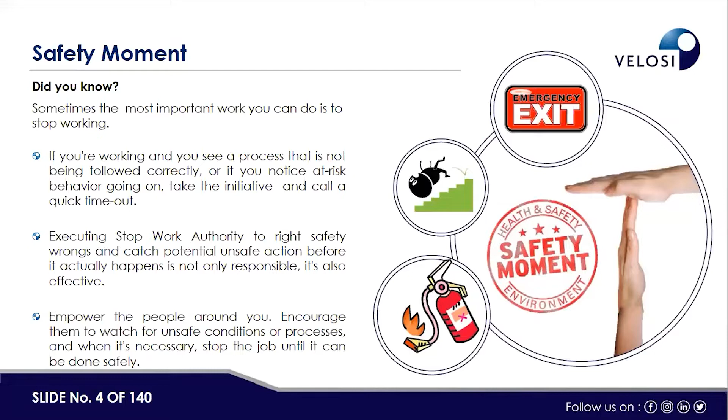We'll be touching key theoretical and practical aspects of the implementation of ASME B31.8S and API 1160. Today's agenda includes an introduction about Velosi, the pipeline integrity overview, standards and regulations. We'll be sharing one case study overview, and we'll be presenting the software demo.

We will be following a practical approach and walk you through the key steps through the case study. Please note that the client name and the data have been redacted. Now I'll be handing it over to Mr. Ijazul Kareem Rao, who will be proceeding with today's topic.

Thank you, Ms. Samia, and Assalamu alaikum everyone. Good day. Today's topic is PIMS, which will mainly be focusing on PIMS onshore. The main reference standard would be ASME B31.8S, which is more or less comparable with API 1160, covering both oil and gas pipelines. Before we go to the topic, what is asset integrity?

In general industrial definition, asset integrity is a continuous process of knowledge and experience applied throughout the life cycle of an asset to manage the risk of failure and events in design, construction, during operation of the facilities, and till retirement or decommissioning. Now, let's define design integrity, technical integrity, and operational integrity.

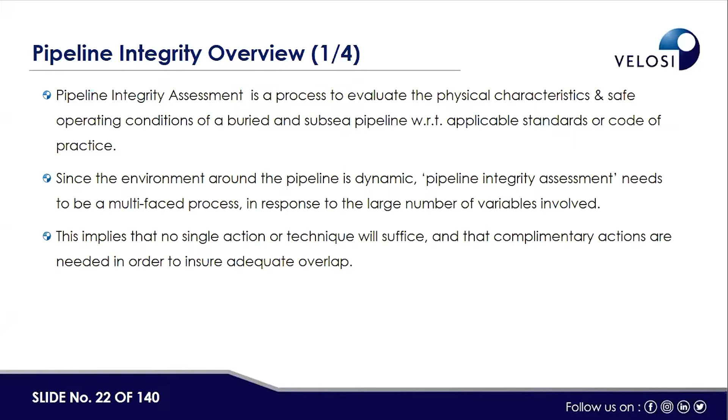Since the environment around the pipeline is dynamic, pipeline integrity assessment needs to be a multi-faced process in response to the large number of variables involved. This implies that no single action or technique will be sufficient, and complementary actions are needed to ensure adequate overlap. Under pipeline integrity, there's a macro analysis and there could be a micro analysis as well.

In general terms, what we need to analyze is historical data of the pipeline, how the pipeline was designed, procured, and built. This requires, for example, diameter of the pipeline, wall thickness, grade of the steel, type of pipe like seamless, ERW, DSAW, class location, year of installation, types of coatings, operating pressures and temperatures, hydrotest data, inline inspection data, or DCVG, CIS surveys.

In case of offshore pipelines, there could be on-bottom stability, ROV inspections, and for example the free spans, condition of the anodes - those things are also required as part of macro analysis.

Then in onshore or offshore pipelines, analyzing the existing CP systems' capability, like the life of an anode, whether enough protection is being provided by the CP system. This includes IP type CP systems, year of permanent system installation, type of system like galvanic or impressed current, analyzing the trend in rectifier outputs with time, analyzing pipe-to-soil potential at test stations, analyzing previous pipeline survey data, and identifying areas where potential anomalies exist.

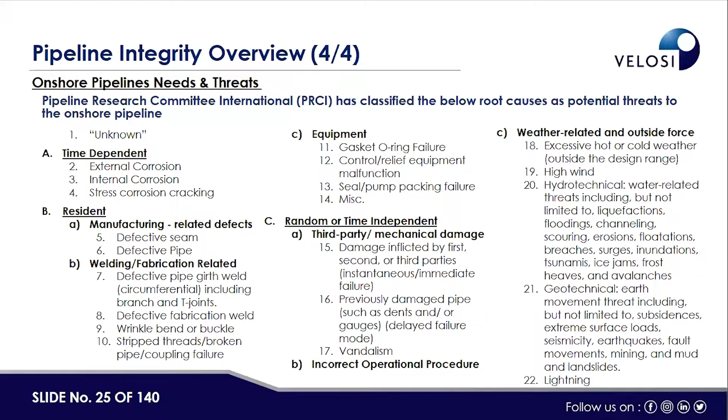Regulations and industry standards. There are many standards involved, but mainly two standards form the framework to manage integrity of pipelines, both oil and gas. ASME B31.8S relates to managing system integrity of gas pipelines, whereas API RP 1160 covers managing system integrity of hazardous liquid pipelines. When we compare the content of both standards, they are more or less the same. There are some differences, but 80-90% they match with each other.

Then other standards, other than the design ones related to integrity, are mainly NACE standards like ECDA, ICDA, and for example stress corrosion cracking related direct assessment, which is NACE RP 204. Then control of external corrosion on underground or submerged piping systems, which is SP 0169, and SP 0106, which is control of internal corrosion in steel pipeline and piping systems.

Since the piping systems or pipelines also have valve stations, compression stations, or pumping stations, up to a certain extent we may also need to refer to API 510, 570. If there are vessels for collection of, for example, condensate, then 510 would also be applicable. Otherwise, 570, 571, API 580, API 581, API 579.

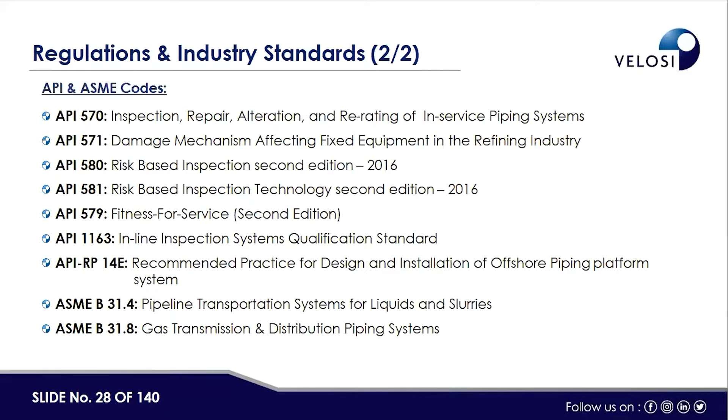Then API 1163, which is the inline inspection system qualification standard. Then API RP 14E, which is related to sizing. Then ASME B31.4 and ASME B31.8, which are used for the design of liquid pipelines and gas pipelines, respectively.

Since our main topic today is PIMS, Pipeline Integrity Management System, which is being driven mainly by ASME B31.8S, Velosi has developed its PIMS system, which is also certified in compliance with this standard by a third party.

So if we see the title and subject, people may get familiar with this standard. In today's presentation, many people are attending, but from a background point of view they range from young engineers from university to experienced people. So a few things are very basic, and then some advanced things would also be discussed during today's session.

Now this is basically the title, and if we see the index: number one, introduction, then integrity management program overview, then consequences, like how to establish consequences of any failure, then gathering, reviewing, and integrating data. Remember, pipelines are in kilometers, and a proper system is required for how that information can be organized. Then risk assessment, then integrity assessment, then responses to integrity assessment and mitigation, repair and prevention, then integrity management plan, then performance plans, then communication plans, management of change plans, then quality control, terms and definitions.

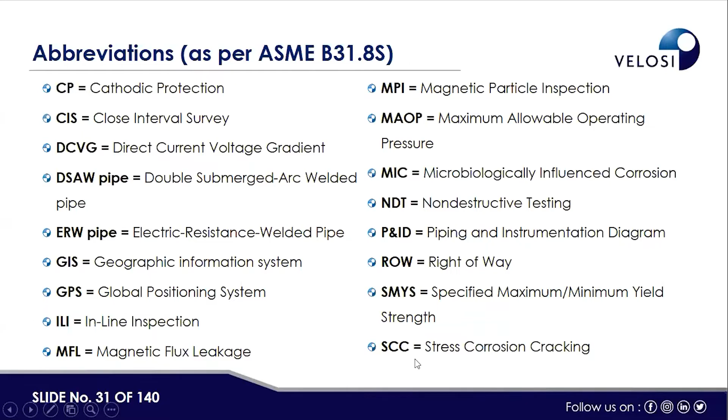Then a few definitions: active corrosion means corrosion that is continuing, not prevented or not arrested. Anomaly and pipeline data analysis means the process through which anomaly and pipeline data are integrated and analyzed to further classify and characterize anomalies.

Bell hole is an excavation to minimize surface disturbance, digging the area around the pipeline within about 2 to 3 meters so we can see the underground pipeline. Then caliper tool, or geometry tool, is an instrumented inline inspection tool designed to record conditions such as dents, wrinkles, ovality, bend radius, and angle by sensing the shape of the internal surface of the pipe. Coating system is the complete number and type of coats applied to a substrate to prevent the external corrosion of the pipeline.

Components and pipeline component means an individual item or element fitted in the pipeline, like there could be valves, flanges, elbows, T's, and other closures. Then composite repair sleeves are the sleeves which are used to repair the pipeline in a certain condition.

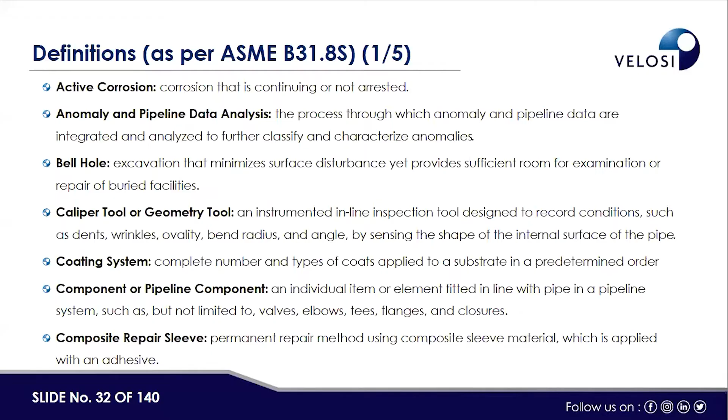Corrosion means a deterioration of a material, usually a metal, that results from an electrochemical reaction with its environment. Corrosion inhibitor is a chemical which is injected in the pipeline to prevent corrosion. Corrosion rate means the rate of corrosion which is taking place in the pipeline, on a segment per year basis.

Crack is a very narrow elongated defect caused by mechanical splitting into two parts. Dent is a permanent deformation of the circular cross section of the pipe that produces a decrease in the diameter and is concave inwards. Engineering assessment means the engineering studies.

Engineering critical assessment is engineering where we try to identify the criticality of the component of the pipe in terms of probability, consequence, and then see how critical is that particular segment.

Inline inspection tool, these are basically pigging tools which are used like MFL or UT type tools that will be covering a little bit further. In-service pipelines mean the pipelines which are transporting the products in operating conditions.

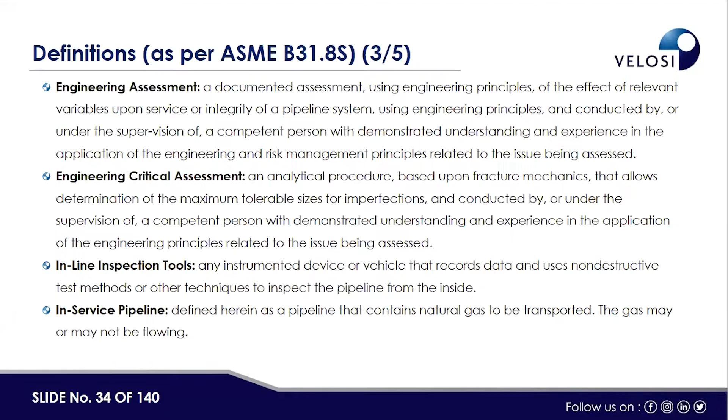Pig launchers are where the pigs are basically launched or sent in the pipeline. Management of change means the process in which changes are controlled in the pipeline or in any system. Mitigation means the actions which are taken to prevent any defect or anomaly which may propagate.

Performance-based integrity management program means like how to check the KPIs and performance of the pipeline and then required action to be taken. Pigging is basically ILI, or a cleaning pigging is also there. So both types are called pigging.

Pipe to soil potential is electrical potential difference between the surface of a buried or submerged metallic structure. The right of way is the pipeline's route, and sometimes they are fenced, and sometimes there is some road or access is also provided. The survey could be made for the cross-country pipelines.

Risk means measure of potential loss in terms of both the incident probability, likelihood of occurrence, and the magnitude of the consequences, which is a multiple of both POF and COF.

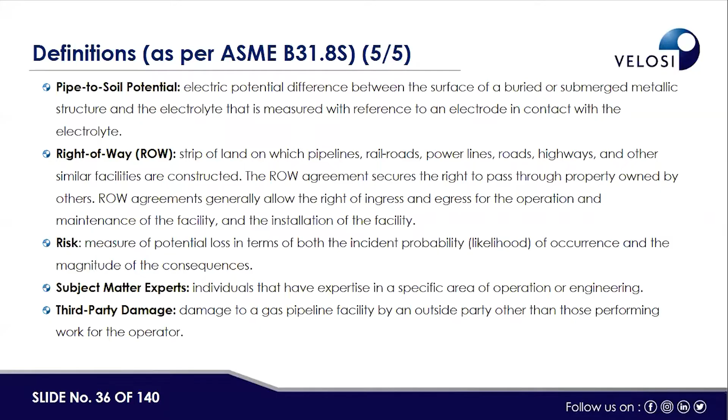Subject matter experts are basically people who have a thorough knowledge about the subject. Third party damage means basically a third party other than the operator, if any party may play some role in affecting the performance of the pipeline.

The scope of the standard is basically to develop the standard, to develop the system so as you can manage the integrity of the pipeline system with a global picture in mind.

Purpose, basically explained earlier: if you see that comprehensive, systematic, and integrated integrity management program provides the means to improve the safety of the pipeline system.

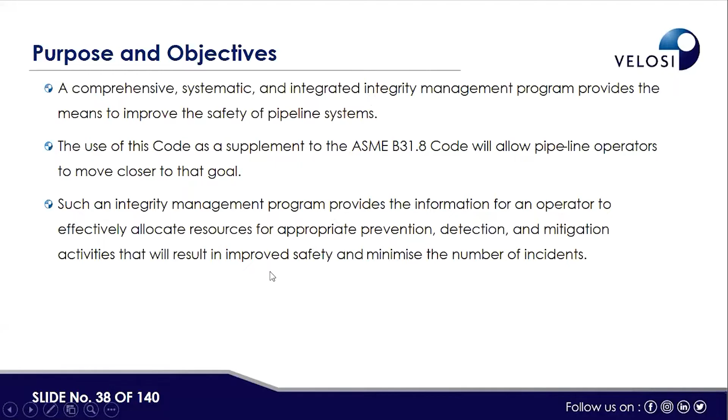The use of this code as a supplement to the ASME B31.8 code, and will allow pipeline operators to move closer to the goal. Such an integrity management program provides the information for an operator to effectively allocate resources for appropriate prevention, detection, and mitigation activities that will result in improved safety and minimize the number of incidents.

So from a principal point of view, a set of principles is the basis for the intent and specific detail of this code, which is called the functional requirement, system integrity, integrity management program, and information integration.

Under functional requirement, integrity management shall be engineered into the new pipeline system from initial planning, design, material selection, and construction. Integrity management of a pipeline starts with sound design, material selection, and construction of the pipeline in accordance with the applicable codes and good quality standards.

System integrity requires commitment by all operating personnel using a comprehensive, systematic, and integrated process to safely operate and maintain the pipeline system. An integrity management program is continually evolving and must be flexible, and should be customized to meet each operator's unique conditions.

Information integration is a key component for managing system integrity. A key element of the integrity management framework is the integration of all pertinent information when performing risk assessment, condition assessment, or integrity assessment.

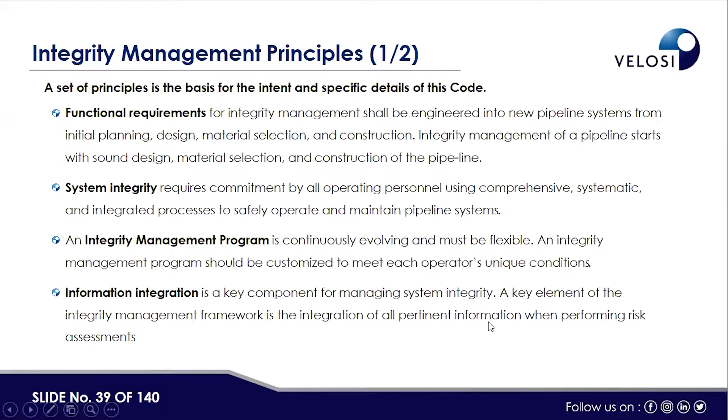So risk assessment, as I already explained, involves POF and COF. Then performance measurement is defining the KPIs and checking that all integrity KPIs are properly defined, whether in terms of remnant life, leakage, or any anomalies, or positive KPIs could also be there, and then those are monitored by a proper system and reported.

So if you see the integrity management program overview, as per ASME B31.8S, there are 5 sub-elements.

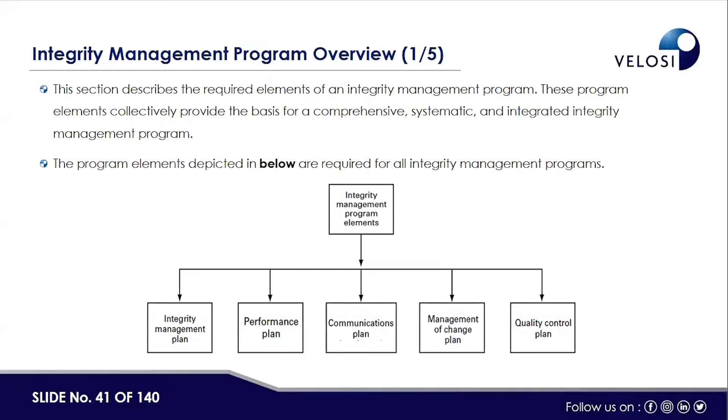First is the integrity management plan, then performance plan, communication plan, management of change plan, and quality control plan. All these aspects are required to be reviewed and implemented properly, with competent people under competent authority.

Now from a step point of view, gathering, reviewing, and integrating the data is the first thing. That's why we recommend either an Excel-based system or newer web-based systems or software, which should be available to gather all the information and arrange it in a way people can use at the time of need.

Then you review assumptions used in the risk assessment. These are not just simple steps, but this is as per the standard I'm referring to. As we go into detail, we'll also share a case study on how we implement it. It's not as simple as it seems here.

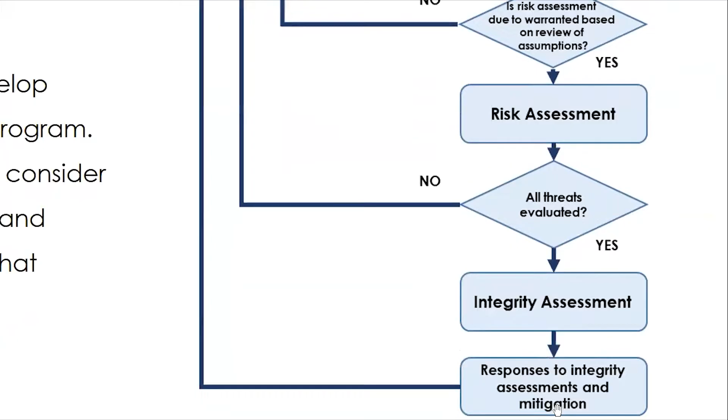Review assumptions used in risk assessment. Then, is risk assessment due, warranted based on review of assumptions? Then risk assessment is done, all threats evaluated, then integrity assessment, then response to integrity assessment and mitigations required. And then you identify a potential pipeline impact threat and try to manage it.

This code details two approaches to integrity management: a prescriptive method and a performance-based method. Prescriptive method requires the least amount of data and analysis and can be successfully implemented by following the steps provided in this code. It incorporates expected worst-case indications to establish the interval between successive integrity assessments, in exchange for reduced data requirements and less extensive analysis.

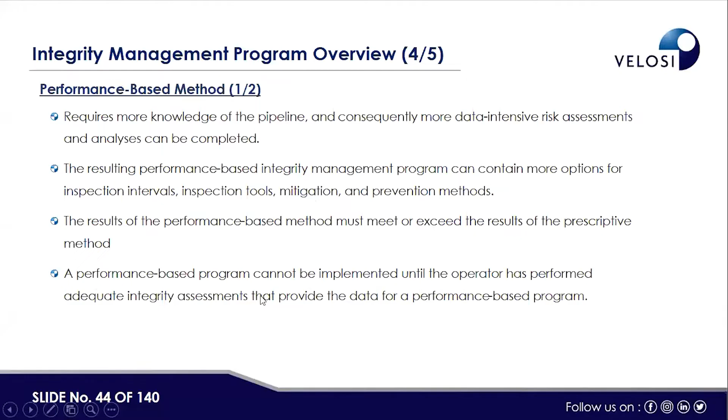Performance-based requires more knowledge of the pipeline and consequently more data-intensive risk assessment and analysis. The resulting performance-based integrity management program can contain more options for inspection intervals, inspection tools, mitigations, and preventive methods. The result of this performance-based method must meet or exceed the result of the prescriptive method. A performance-based program cannot be implemented until the operator has performed adequate integrity assessment that provides the data for the program.

The performance-based program shall further include the following integrity management parts: a description of the risk analysis and method employed, documentation of all applicable data for each segment and where it was obtained, a documented analysis for determining integrity assessment intervals and mitigation repair methods including repairs and prevention, and documented performance metrics that in time will confirm the performance-based options chosen by the operator.

There is no single best approach applicable to all pipeline systems—this is a caveat or warning. Sometimes people say the performance-based method means a reactive approach, but no, it is not calling for a reactive approach. It means that once you have implemented a prescriptive-based or detailed system, you can see the results of the assessment, the behavior of the pipelines in terms of leaks, failures, surprises you might face, or positive KPIs. Then accordingly, the performance-based approach can be followed.

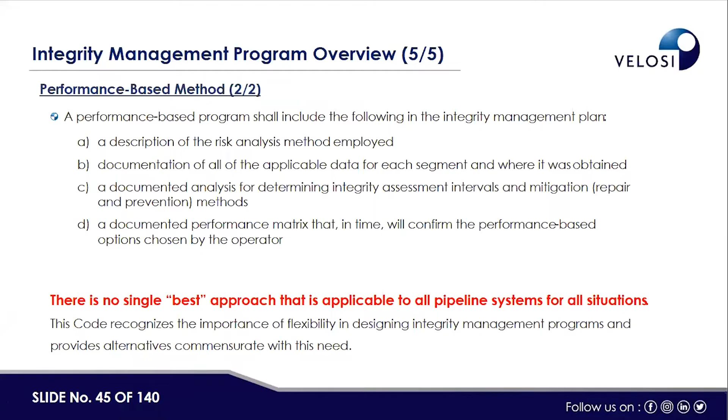Actions or efforts required to maintain a pipeline integrity management system could be reduced with the passage of time. So we will be having a question and answer session—please keep sending your questions, and as we complete this section, we will answer those questions.

The first step in managing integrity is identifying potential threats to integrity. All threats to the pipeline shall be considered. Gas pipeline incident data have been analyzed and classified by the pipeline research committee international into 22 root causes or threats identified. One cause reported by operators is unknown—that is, no root cause or causes were identified.

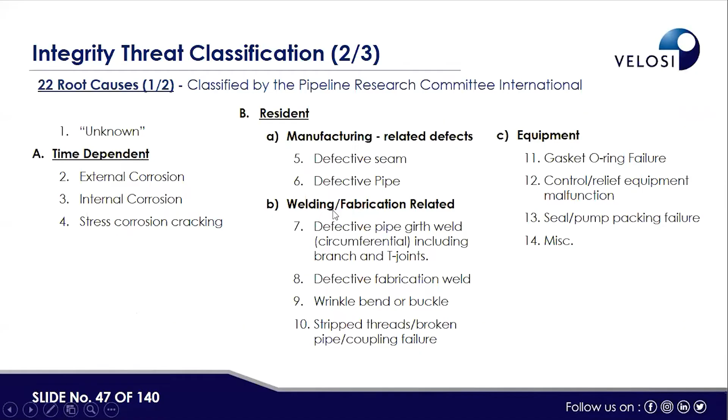The remaining 21 threats are grouped into 9 categories of related failures, the type I explained in a previous slide. It's a bit repetitive since this slide was covered earlier too. Of the total 22 root causes, one is unknown, then the others are counted: time-dependent, manufacturing-related defects, welding and fabrication-related defects, equipment-related defects, random or time-independent, third party, incorrect operational procedures, and weather-related, which I covered earlier as well.

Now, the integrity management process—it's more or less the same as covered earlier, a sort of repetition in the standard. Gathering, reviewing, and integrating data, reviewing assumptions used in the risk assessment, then whether risk assessment is due, warranted based on review of assumptions, then actual risk assessment with all threats evaluated, integrity assessment, and response to integrity assessment and mitigation. So risk assessment, from a pipeline integrity point of view, is threat based.

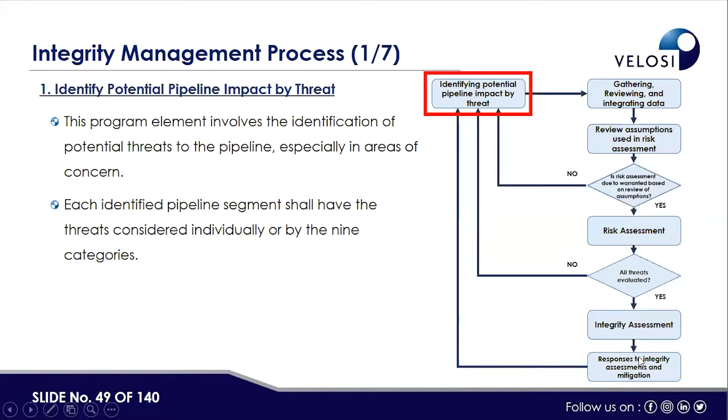So the process is the same, but the only thing is you have to identify each threat separately. Then gathering, reviewing, and integrating data. The first step in evaluating the potential threats for a pipeline system or segment is to define and gather the necessary data and information that characterize the segment and the potential threats to the segment.

So we first do segmentation, and we'll see implementation of this process in the next case study. In this step, the operator performs the initial collection, review, and integration of relevant data and information needed to understand the condition of the pipe, identify the location-specific threats to integrity, and understand the public, environment, and operational consequences of an incident.

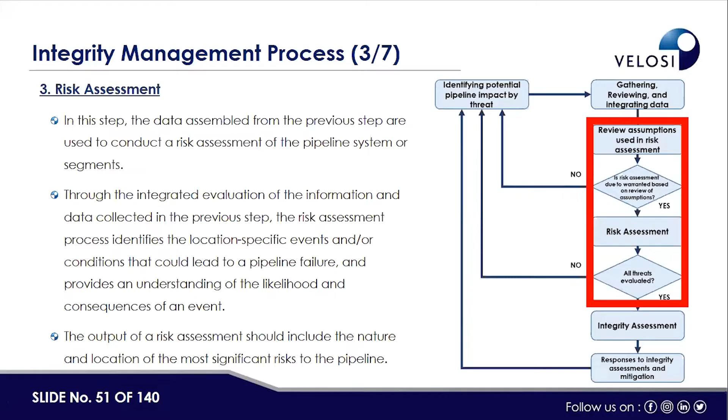The risk assessment, in this step, the data - basically we try to use the basic data, then identify the threat or damage mechanism or failure modes, and their probability is assessed. Then if something goes wrong, we assess the consequence in terms of safety, environment, or health of the people. Then both POF and COF are multiplied and risk is calculated. This is the process of risk assessment as I explained earlier.

Then integrity assessment - basically integrity means there could be a defect, there could be growth of that particular defect, growth rate assessment. There could be fitness for service assessment in accordance with ASME B31G, or as per API 579 standard. Based on the risk assessment made in the previous step, the appropriate integrity assessments are selected and conducted.

The integrity assessment methods are inline inspection measurements, pressure testing, or other integrity assessment methods. Method selection is based on the type of damage mechanisms or failure modes applicable. More than one integrity assessment method may be required to address all the threats to a pipeline. Under this assessment, ECDA, ICDA, SCCDA - all those processes are also applicable.

Then response to integrity assessment - mitigation, repair. Once we have conducted integrity assessment, from a process point of view, we first identified the potential threats, then carried out applicable inspections or assessments. Based on inspection results, we now know where the weak areas, weak links, and potential defects are, and where there's potential leakage, where we need repairs, clamping, or repair of the paint system.

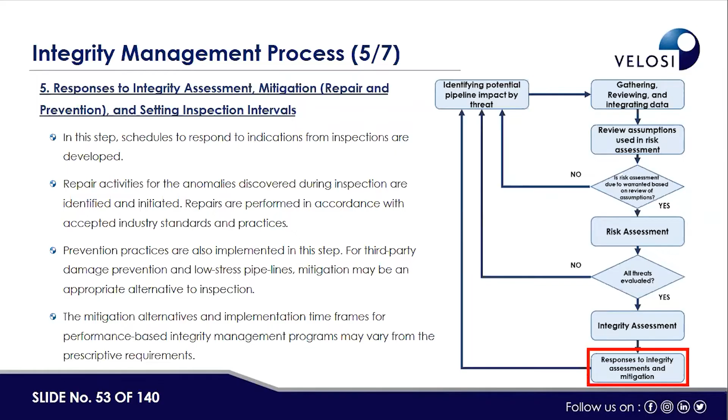After the data is established, after segmentation of the pipelines is done, threats are identified, POF assigned, risk assigned, then we go to the assessment part or inspection planning part. Once the results are known, if there are defected areas or weak areas, mitigation actions in terms of corrosion inhibition, repair, or preventive clamping are done in this process. Update, integrate, and review data.

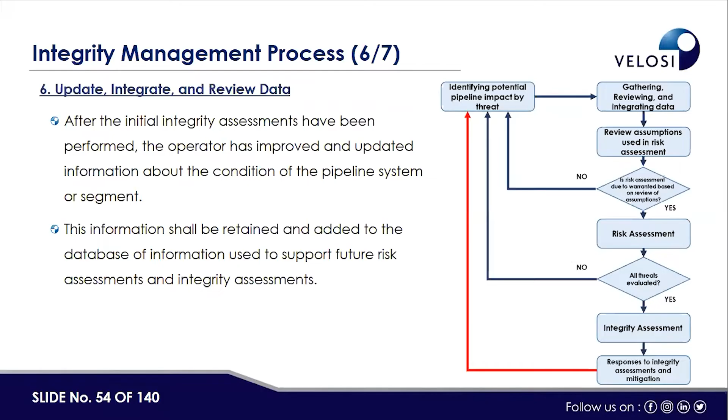Once you've done some corrective actions, repairs, or corrections, that data has to be updated into the PIM system. That is one of the last parts of the process, and so you are ready for the next step.

Once these corrections are done, you can reassess the risk, and if it's in the safe zone, you can plan the next action for your integrity management campaign or inspection campaigns and plans to execute in future. Based on your integrity assessment or risk assessment, we try to prepare the integrity management plan for the coming years - next 10 years, 20 years.

What actions are required to be done by the operator, owner of the pipeline, inspection department, or pipeline department itself - however your department or company is organized. The integrity management plan is the outcome of applying the processes depicted in the integrity management process. The plan documents execution of each step and supporting analysis conducted. The plan shall include prevention, detection, and mitigation practices, and shall also have a schedule established that considers the timing of the practices deployed.

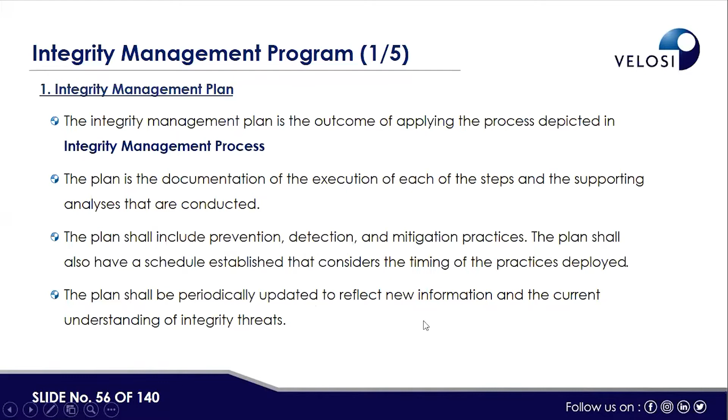The plan shall be periodically updated to reflect new information and current understanding of the integrity threats.

Performance plans: the operator shall collect performance information and periodically evaluate the success of its integrity assessment techniques, pipeline repair activities, and mitigative risk control activities, whether those are working and effective. The operator shall also evaluate the effectiveness of its management system and processes in supporting sound integrity management decisions. The application of new techniques into the integrity management program shall be evaluated for future use in the program.

Communication plan: the operator shall develop and implement a plan for effective communication with all stakeholders, covering employees, the public, the emergency responders like district management, civil defense, local officials, and jurisdictional authorities, in order to keep the public informed about their integrity management efforts. The pipeline shall provide information. The plan shall provide information to be communicated to each stakeholder about the integrity plan and the results achieved.

This is as per the local regulators, specifically this American standard. So these guidelines are written in accordance with American working practices.

Then, management of change plan: if there is any change in the system or a change in the integrity management program, it has to be properly documented. Pipeline systems and the environment in which they operate are seldom static - they will be changing. So for those changes, there would be a requirement of a management of change program.

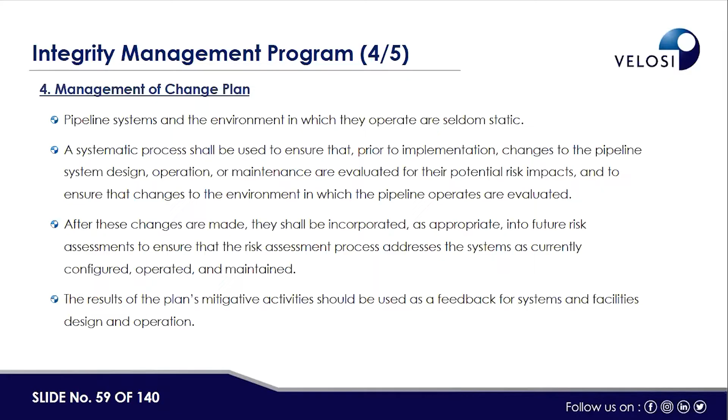The results of the mitigative activities should be used as feedback for system and facilities design and operation.

Quality control plan: for example, whatever activities are being done - whether data gathering, risk assessment, integrity assessment, inspection, information handling, or management of change - the quality of the actions should be ensured properly, with proper documentation, competent people doing the work, and errors being verified, reviewed, and corrected. So quality aspects have to be maintained in each step of the PIMS system.

Consequences point of view: earlier I discussed the threats. From the consequences point of view, when we go to risk assessment, risk is a multiple of POF and COF. The consequences of any failure - for example, if a pipeline is passing by a residential area and it leaks - there could be effects on the environment and on the people. If it catches fire, it could have a huge impact on that particular area.

In oil pipelines too, especially in third world countries where the right of way is not protected or barricaded or fenced, people may go there unknowingly or with the intention of stealing. So there are issues like leakage, fires, and casualties or fatalities.

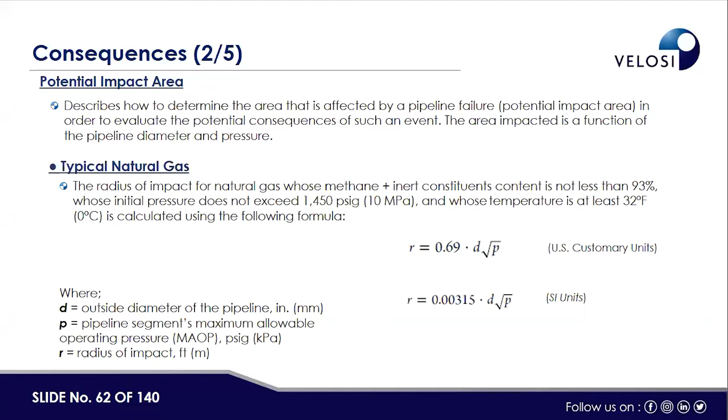The potential impact area - for example, if a pipeline may leak or fail, what area would be affected? This equation, R equals 0.69 times D times the square root of P, is available in both US customary and SI units, and it tells how much area would be impacted by the pipeline. This one is for natural gas; other equations are required for other gases.

A similar methodology may be used for other lighter-than-air flammable gases. The natural gas factor of 0.69 in the typical gas formula must be derived from the actual gas composition or range of composition being transported. Depending on the gas composition, the factor may be significantly higher or lower. The methodology may not be applicable or sufficient for non-flammable gases, toxic gases, and others.

However, nowadays consequence modeling can also be done using other software like DNV's PHAST, which is very good for dispersion modeling. It has the capability to model whatever chemicals or hydrocarbons are in the pipeline, and that can also be used.

So other considerations can also be used, and this equation is also available for consequence assessments. In RBI of pipelines, we normally take help from QRA data. The basis of the information is the QRA data, which can be used for the consequence or area that would be affected in terms of any leak of a hydrocarbon or toxic element from that gas pipeline.

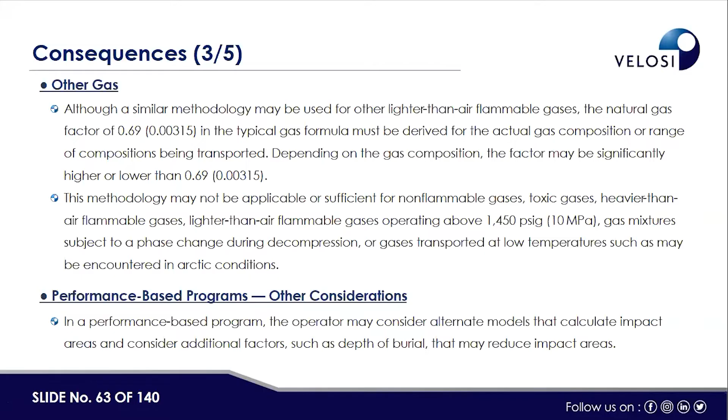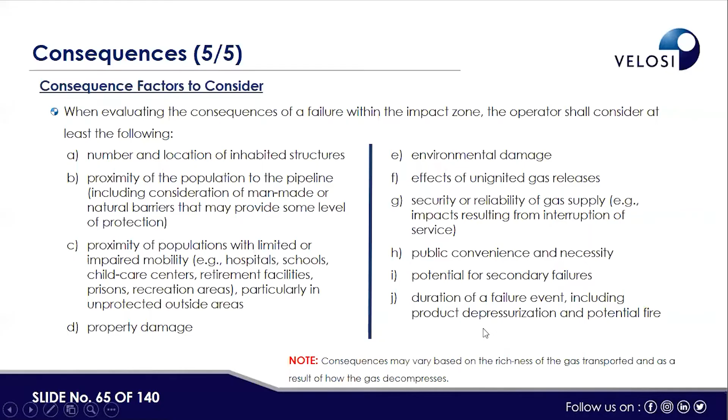So factors to consider when evaluating the consequence of failure within the impact zone - the operator shall consider at least the following: the number and location of inhabited structures, proximity of population to the pipeline including consideration of man-made or natural barriers that may provide protection, proximity of population with limited or impaired mobility - for example, hospitals, schools, childcare centers, retirement facilities, prisons, recreation areas, particularly unprotected outside areas should be considered. Then property damage, environment damage, effect of unignited gas releases, security or reliability of gas supply, public convenience and necessity, the potential for secondary failures, duration of a failure event including product depressurization, and potential fire.

Then gathering review - now we are going into more detail on how to gather information. I'm spending more time narrating the standard; mostly the contents are the same as in ASME B31.8S, but the focus is to get you familiar with the terminologies given there. Then we will show a worked example also, quite simple, as we create the practice. Narrating the standard looks a little boring, so there's less chance to get people involved, but I hope none of you will be sleeping - please be active, and we will go to the question-answer session soon.

But this is a little boring subject, though interesting for the sake of knowledge - gathering, reviewing, and integrating data. The things discussed earlier, now in more detail. This section provides a systematic process for pipeline operators to collect and effectively utilize data elements necessary for risk assessment, integrity assessment, or any kind of decision making for the pipeline. Comprehensive pipeline facility knowledge is an essential component of the performance-based integrity management program. Information on operational history, the environment around the pipeline, mitigation techniques employed, and process/procedure review is also necessary. Data are a key element in the decision-making process and required for program implementation.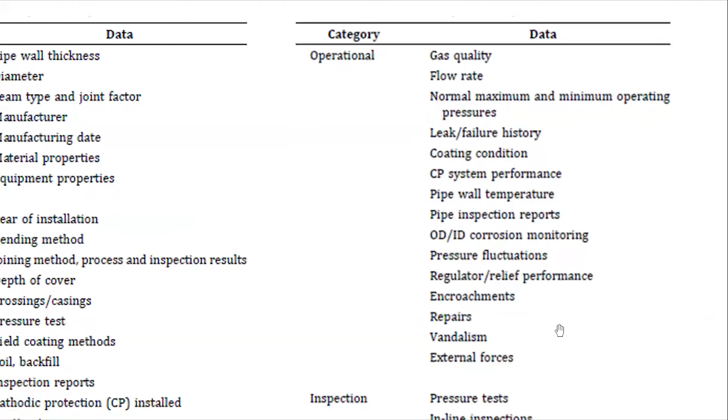Pressure fluctuations, regulator or relief performance, encroachments by third party, then repairs if any, terrorism, vandalism, or external forces, then inspections - for example pressure test, inline inspections, geometry tool inspection, bell hole inspections, CP inspections, coating audits.

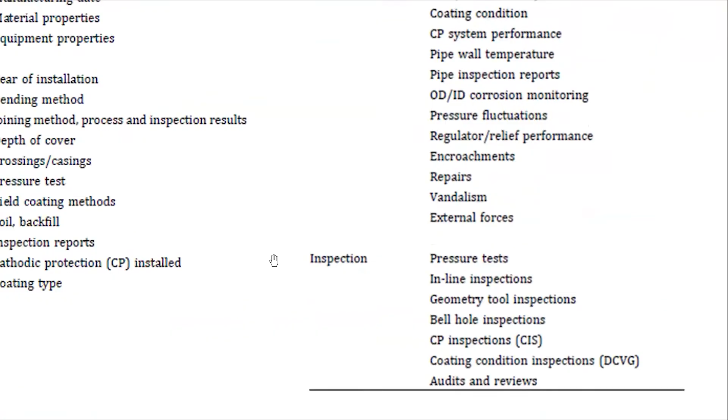So all this information is required to be gathered basically as pipeline basic information in the PIMS system.

Then, there is no standard list for performance based criteria, but if we see it - whatever the KPI, let's say we wish to have zero leaks.

Like the operator says whatever it takes, we'll take all precautionary or preventive measures so there is no leakage. And if that is the performance criteria, then accordingly all information has to be gathered and arranged for the PIM system so that target of the performance criteria could be met.

The quantity and specific data elements will vary between operators within a given pipeline system. Focus shall be on collecting the data necessary to evaluate areas of concern and other specific areas of high risk. These data are then integrated into the initial data. The volume and type of data will expand as the plan is implemented over years of operation.

Data sources - from a data sources point of view, the first thing should be the pipeline specification. Then if there are P&IDs, alignment sheets, then coating specification, CP specification. All the engineering data is first, hydraulic calculations, corrosion inhibition details.

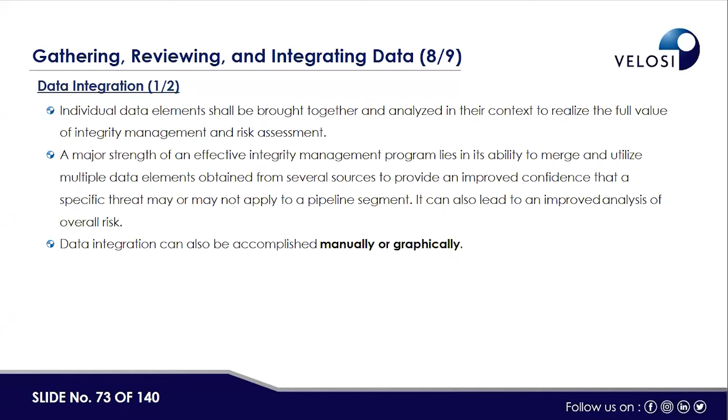Data integration can also be accomplished manually or graphically, or through a manual system. It's not compulsory there should be a software system, but it's easier nowadays to have a software database rather than a manual one. Manual integration and graphical integration could go side by side, but either way it is possible only through a software system rather than a paper-based system.

Now, since both gas pipelines and oil pipelines are covered under the PIMS system - ASME has issued ASME B31.8S, and API has released API 1160.

Both standards are wrapped in each other. Both are American standards, and the elements of integrity management in both standards are more or less the same. In the next presentation, we will make a matrix comparing all elements. In this presentation, I missed making that compliance matrix between these two standards.

But as per our working practice, both are more or less same. Let me explain: integrity management program uses the same terminology. Then high consequence area or consequence assessment. Data gathering, review and integration is same in ASME. All these terminologies are risk assessment, same as in ASME B31.8S. Then initial baseline assessment plan development and implementation, which is also development of the integrity assessment plan in ASME B31.8S.

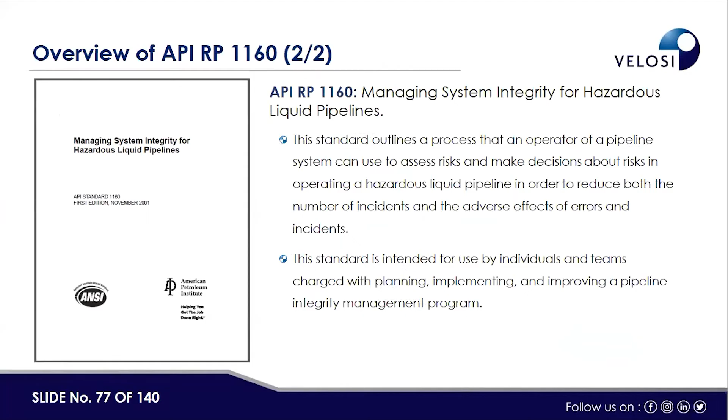So both standards are more or less the same. It doesn't matter whether you follow API 1160 or ASME B31.8S, both are practically matching each other. This is basically the standard; I'm not passing more details. Before we go to the case study, we'll take a question and answer break now.

Who will read the questions? Here are some questions. Between short and long radius bend, which one has higher corrosion based on your field experience? In general terms, a short radius would have more erosion-corrosion chances, and that would lead to more corrosion.

Is there any relation between the individual API new certification API 1169 and the pipeline integrity management webinar? I don't remember the exact title, but it's related to inspection - pipeline facility construction inspection. API 1160 or ASME B31.8S cover the basic elements of the PIMS system - engineering related data, inspection activities, mitigation plans, or integrity assessment plans. So these are very much supportive standards for the PIM system - they're not different, they support and complement each other.

How can a cross-country pipeline be controlled directly by a remote control system? No, no remote control can cover the PIM system. The pipeline integrity management system is managed by the operators - there is an integrity department, there are patrols by vehicle, and there could be patrols by drones to check for third party intrusion. But drones can only be used for monitoring purposes. Since most pipelines are underground, a drone won't be able to see anything other than the right of way of the pipeline.

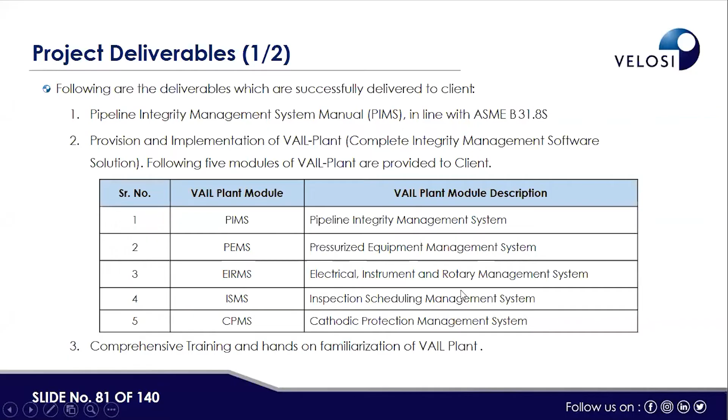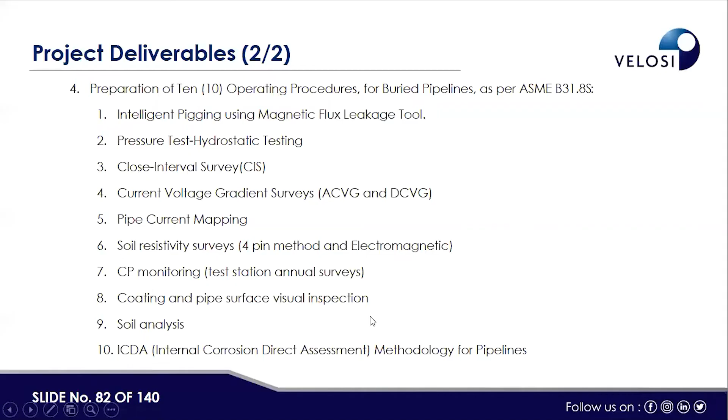Preparation of 10 operating procedures for buried pipelines as per ASME B31.8S, which we covered: intelligent pigging using magnetic flux leakage tool, pressure test, hydro testing, close-interval survey (CIS), current voltage gradient surveys (ACVG and DCVG), pipe current mapping, soil resistivity surveys, CP monitoring procedure, coating and pipe surface visual inspection procedure, soil analysis procedure, and ICDA procedure. The approach was as per ASME B31.8S.

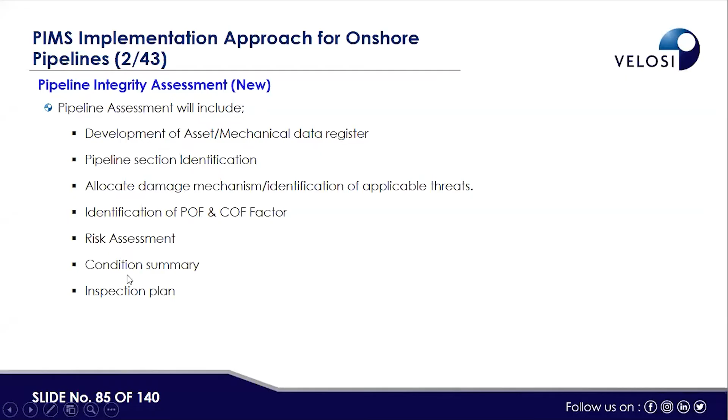Then pipeline assessment follows the same pattern as a normal RBI process. So pipeline integrity assessment for a new pipeline, for example, involves development of an asset mechanical data register, pipeline section identification, allocation of damage mechanisms or threats for each section, identification of POF and COF factors, risk assessment, condition summary, and development of inspection plans.

Then from a pipeline data point of view, there's a list of document data required for pipeline integrity management. This was the point we were discussing earlier, like what are the sources of information and data when developing the PIMS system.

So piping and instrumentation diagrams, process flow diagrams, pipeline layout drawings, engineering data, process data, design change reports, operations, maintenance and repair data, chemical injection type and injection point data, as-built drawings, operation and maintenance procedures, emergency response procedures, GIS coordinates and pipeline inspection data, for example existing CP monitoring results, close interval potential data, intelligent pigging and ILI inspection results, coating assessment survey data, visual and UT gauging data, initial assessment of pipelines, component assessment data, and third-party damage-related data.

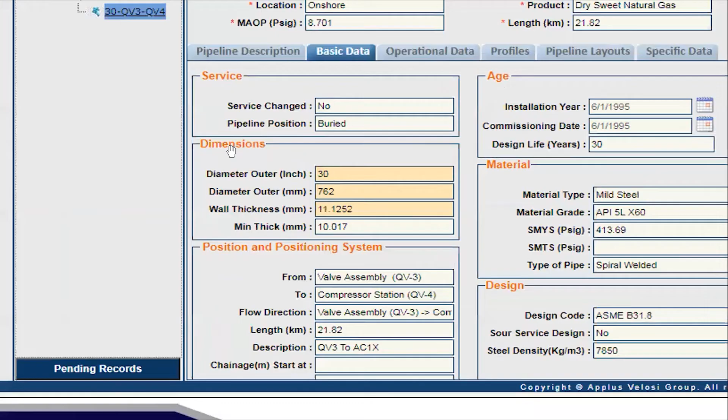Under basic data, for each section of the pipeline: service, dimensions, position and positioning system, age, material, design, then corrosion protection, primary protection, secondary protection, isolation, cathodic protection features. Next is the operational data.

Operational data means service, chemical injection, inspectability, temperature, pressure, all information.

Then profile. Profile has got a lot of details, for example pipeline route, design data, location, safety class, diameter, wall thickness, corrosion allowance, fabrication tolerance, then pipeline material, SMYS, SMTS, steel density, steel E modulus, pipeline coating, operational data, temperature, pressure, and other data is also there.

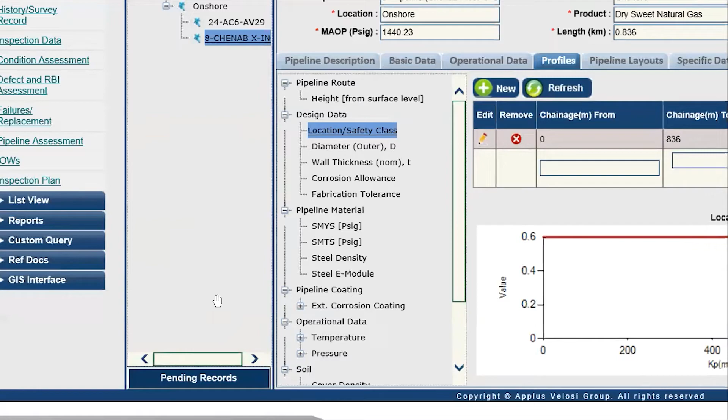So the long list of information needs to be gathered for each meter of the pipeline, not kilometer.

Next is, for example, sectioning the pipeline layout. There are various sections, and it will divide it like a 100 kilometer pipeline could be divided into 20, 30, or maybe around those sections where all crossings, all interfaces, and all areas are identified, as the situation outside the pipeline would be changing.

Remember, inside the fluid would remain the same, but outside pipeline data may change with passage of time. So this is the crossings, sections, components and crossings: railway crossing, river crossing, road crossings. As we go, those we mark on the pipeline.

So if you see, to have one pipeline, only the engineering related data requires a lot of information, and it is practically difficult to show this information without having a proper software.

So after crossing, the survey records, like the inspection history records. There could be various inspections like DCVG, CIP survey, ILI, whatever inspection campaigns are run by the operator inspection department. Those are required to be saved in the system.

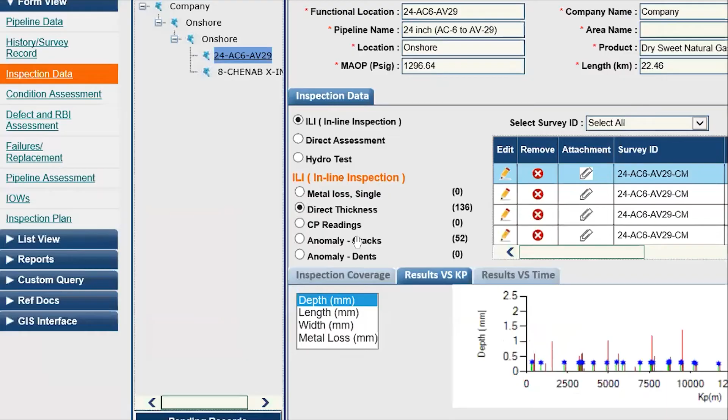Like surveys, for example, if you see the type of survey point of view, there will be ILI data, direct assessment information, hydro test, or the inline inspection data as well. Then metal loss, direct thickness, CP reading, anomaly, cracks. So all this information is required to be imported and saved in the system before we go to the next step.

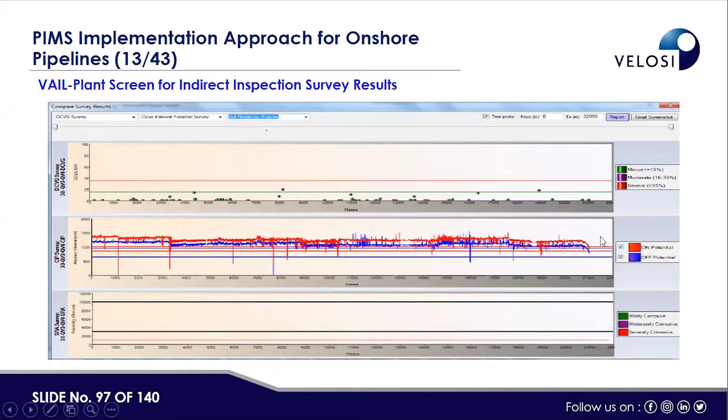Condition monitoring data, for example, visual inspection, leak, failure, replacement, fluid analysis, weight loss coupon, ERP, and hydro tests. Bell hole data, if we are having any bell hole data, that information can be saved.

Then subdividing the pipeline system into sections, like if you see this graphical drawing made outside, shows how the pipeline is divided into various sections.

The risks are not uniform through the pipeline system, partly due to the geography and geometry, partly because of changes in internal conditions, e.g. fluids hotter nearer the production well or after a pump compressor station, and partly because unrelated threatening activity might be localized.

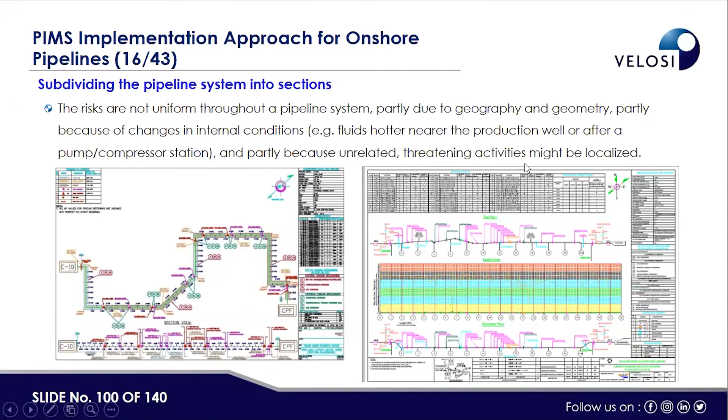So here we try to divide the pipeline into various sections where the damage mechanism, this terminology as per API 571, at various sections, various crossings are marked. It is a quite tedious activity, taking quite effective man hours, which we need to spend, and then we can identify all the threats.

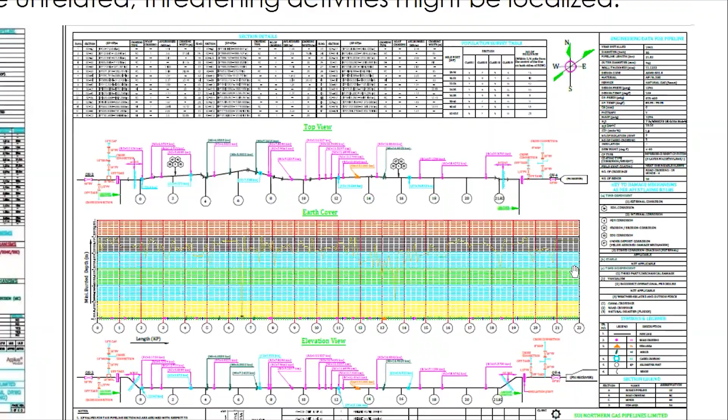And these are modeled in the PIM software. So if you go to the assessment point of view, all those threats, these are the sections of the pipeline, then we identify all the damage mechanisms, internal, external, or threat, and each threat is assessed in the system.

Like threats we already covered before, all threats are covered under this VAIL-Plant PIM system, whether onshore or offshore. Identification of damage mechanism, internal and external threats, are covered by API 571 mainly, then 1160 or DNV RP F116, DNV F107, ASME. So these standards are covered, and our internal and external threats or damage mechanisms are covered under the system, and they could be modeled and assessed.

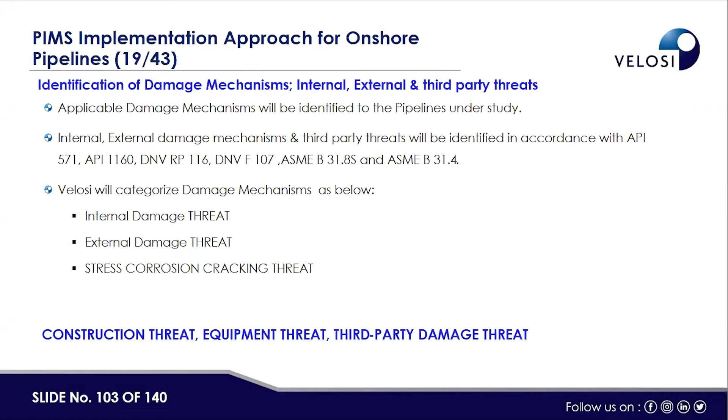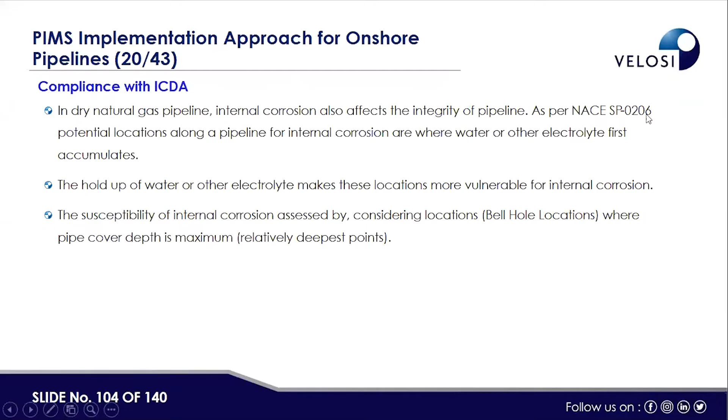Then compliance with ICDA, compliance with ECDA, compliance with SCCDA, those are options which are basically done in accordance with, like ICDA was done as per NACE SP-0206. Then compliance with SCCDA, which is done as per NACE RP 0204.

And SCCDA conditions are: operating stress exceeds 60% of the SMYS, the operating temperature has historically exceeded 38 degrees Celsius, the segment is less than or equal to 32 kilometers, age of the pipeline is greater than or equal to 10 years, and the coating type is other than fusion bonded epoxy. These are the conditions, and as per the client data, the age condition was practically considered not applicable.

These were the threats which were applicable in this particular case, like internal 20, which is erosion corrosion as per the API 571 tag number, then CO2 42, then under deposit 67, external 47, 58, 51, 68. Then in terms of cracking, these were considered like with no API 571 reference, but we have assessed all this.

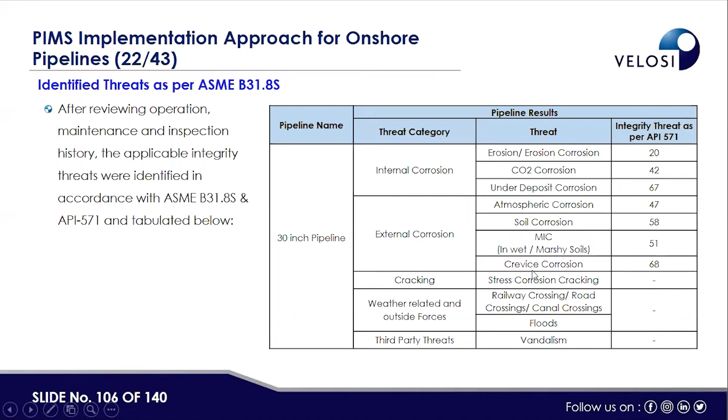Then calculation of POF and COF, this approach was used. As we explained earlier, risk is probability of failure and consequence of failure, the combination of two key factors. Consequence is calculated based on the fluid properties, temperatures, pressures, and inventory.

Probability is based on generic or average failure frequency data, and analysis is then performed considering important failure mechanisms for each pipeline section to determine if it is more or less likely to fail than average.

Then corrosion rate assessment, basically we try to assess both short-term and long-term corrosion rates. Long-term is T nominal minus T last measured, thickness nominal, thickness last measured, then divided by date measured thickness and date of the service start. Then MCR, which is the short term, is the second-last thickness and the last thickness, then date of last measured inspection and date of the second-last inspection. So there's long term and short term corrosion rate, and CA is corrosion allowance.

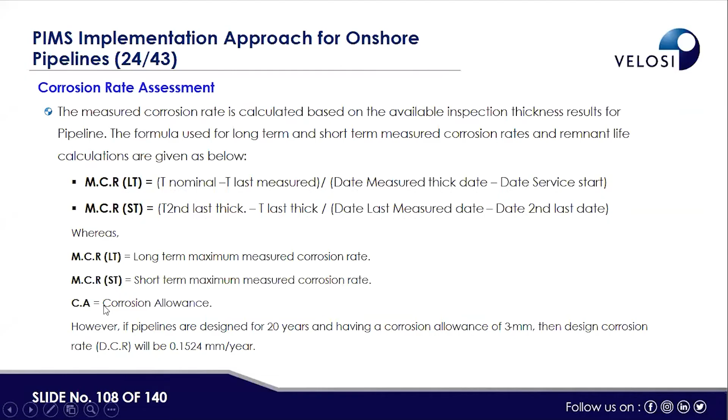Development of inspection plan based on the risk, based on remnant life, we try to determine by following the RBI inspection interval calculation empirical equation, and it will help determine what kind of inspection is required and what should be the next date.

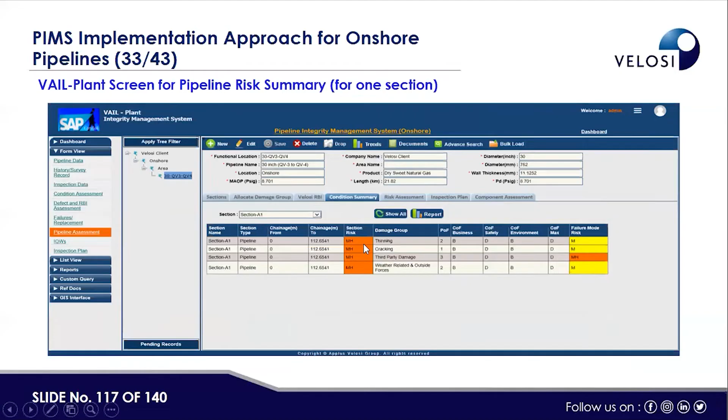Then it's a consequence assessment from environment point of view. It has also 3 levels: location, surface of spill, the consequence class, environmental toxicity, and gas emissions and so on. So at the end, for one particular section, it is showing section 1 against each damage mechanism, what is the risk. So then it is basically KP-wise data.

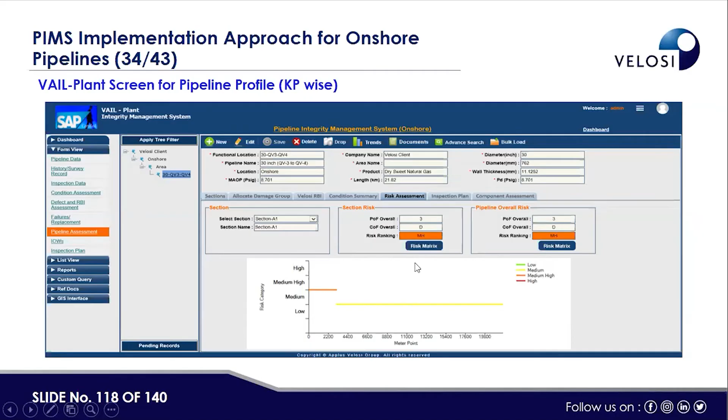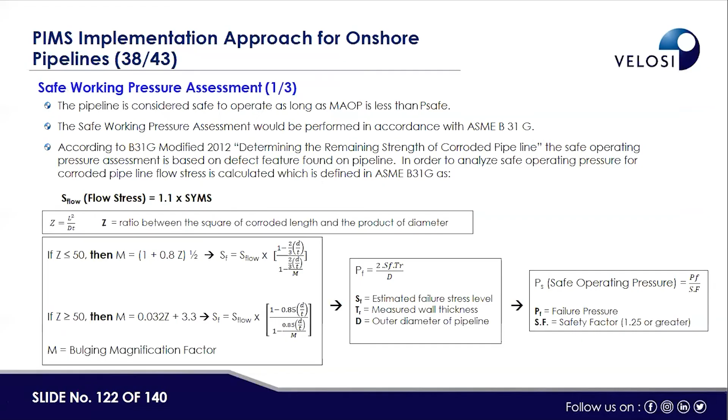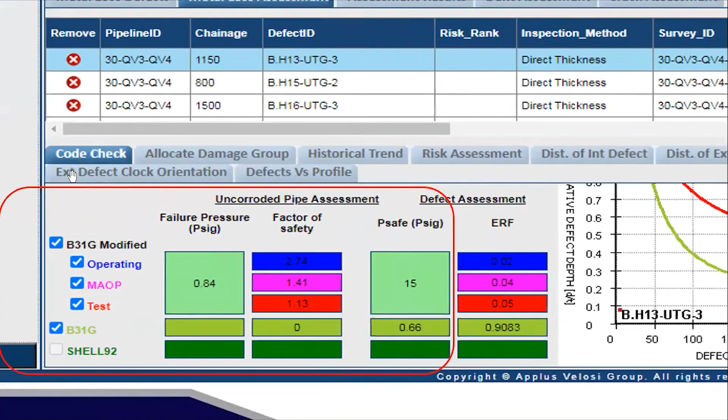In the system we have the option to show, for example, code check, allocate damage group, historical trend, risk assessment, distribution of the defect from an orientation point of view, and then we can see external defect, clock orientation, defect versus profile also can be seen.

So from a working pressure point of view, as MAOP is less than Psafe, therefore the corroded region is acceptable. This is one of the results of this particular pipeline, what we are showing here.

Then defect assessment results point of view, like if we have seen the metal loss, then corrosion rate, then remnant life, and we can see the pipeline life is coming quite high, but we should normally show more than 7 years or less than 7 years.

But graphical distribution of the defects, various defect data is there. Distribution of internal defect, percentage defects with depth versus KP, kilometer post, you can see this. And this is a normal defect depth in percentage point of view. The maximum defect size was 29.1%.

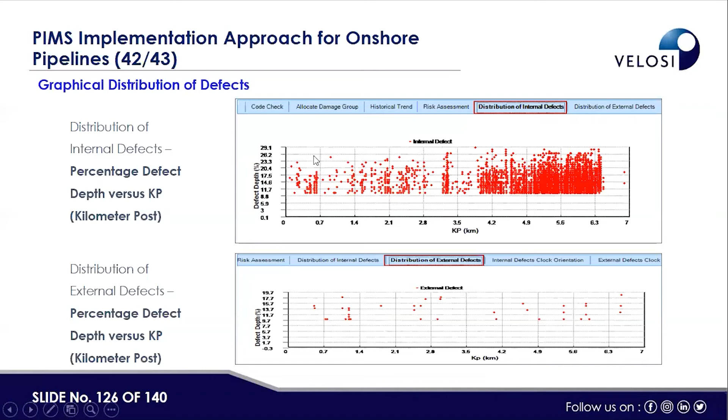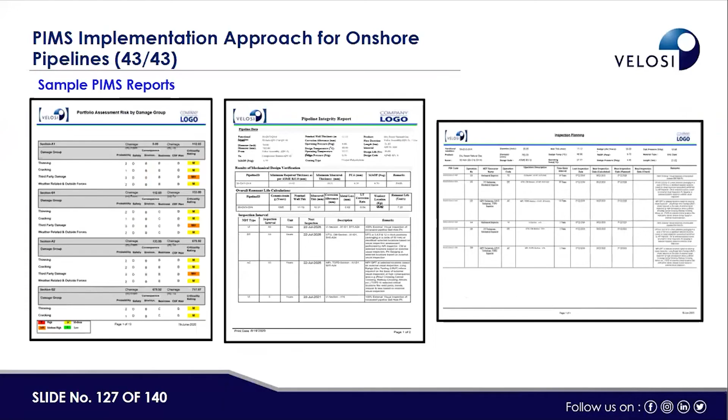So this sample PIMS report, one of the reports, there are various report options available and can be generated by the system. Portfolio assessment risk by damage group, then pipeline integrity report, then inspection planning. Various reports are there, only 3 sample reports are shown here. We'll also have some live demonstration of the system after the demonstration of the slides.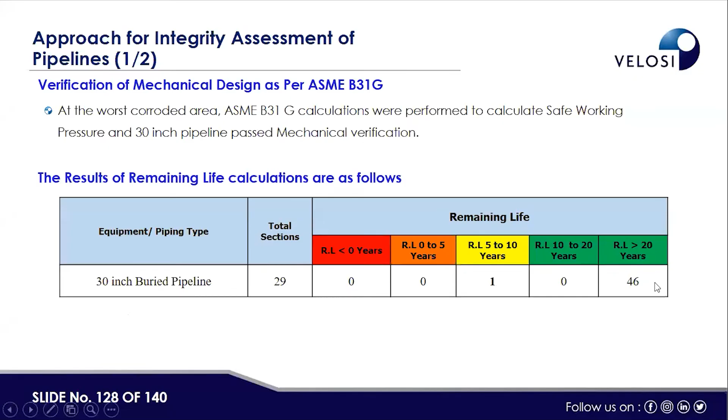Basically, components were there in the pipe. This is the one weakest component. Here, if you see, pipeline integrity assessment result of 30-inch buried pipeline, risk analysis and integrity assessment.

The 30-inch pipeline is a 3-layer polyethylene coated pipeline. In the current operating scenario, the pipeline is fit for service. The operating history revealed that during 2003 and 2004, gas stream from the injection point was found contaminated with black powder. Black powder erodes internals of valves, thus making these ineffective for isolation, and plugs the instruments and tubing as well.

As per the 2016 survey, overall coating condition of the pipeline is good. Coating disbondment was observed between the coating and pipeline surface at a few bell hole locations. No dents or crack-like defects were found at excavated locations. Internal and external metal loss was observed at various locations at excavated bell holes.

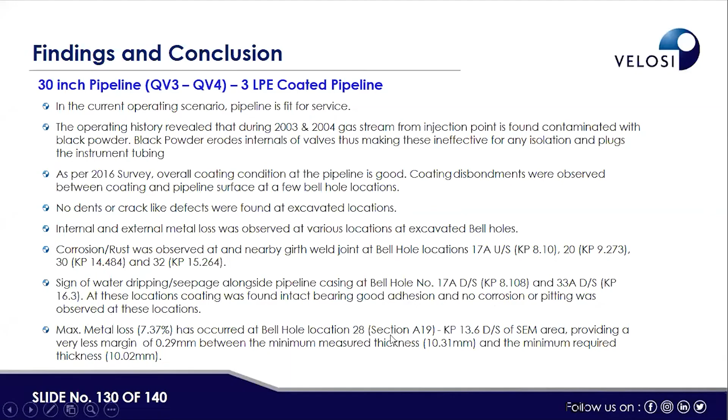So all this data is part of the system and can be summarized. Then there are recommendations given based on the result of the integrity assessment of the pipeline. The following recommendations were given: CO2 and H2S can cause accelerated internal corrosion in the presence of moisture.

It is therefore recommended that online chemical composition and moisture analyzers, which are directly installed at the custody transfer point, shall be connected through RTU to the client control room for online data monitoring and recording, including capturing any upset condition.

It is also recommended to increase the frequency of cleaning by pigging on a yearly basis instead of using cup pigs. A bi-directional pig shall be used, with pig speed controlled from 0.5 to 1 meter per second to achieve good cleaning. It is recommended to frequently pig this line, initially every quarter, and then adjust pigging frequency depending on the amount of debris collected. The amount of collected debris in the pig trap shall not be more than 1 to 2 kg.

As the client provided, the nominal wall thickness for the 30-inch pipeline is 11.12 and the minimum required thickness is 10.02, indicating that very minimal allowance is considered for pipeline structural integrity. The client is to review their selection of design pipe thickness based on API 574 for future pipeline constructions.

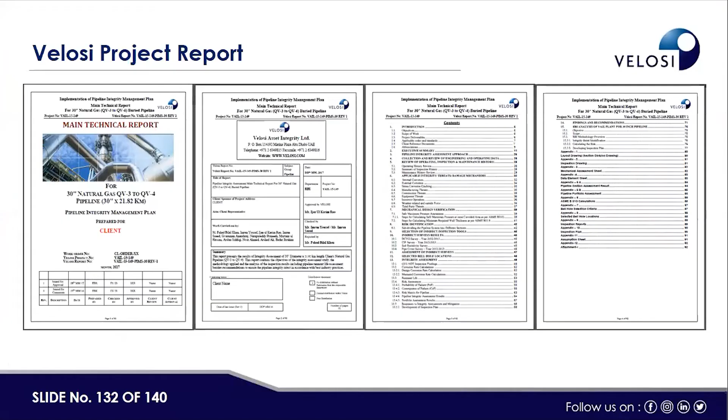Then the documents which are basically developed include the pipeline integrity management manual. Velosi prepared a pipeline integrity management manual in compliance with 31.8S. The PIMS manual was prepared, and this is the content of the manual.

For example: introduction, company PIMS policy and objectives, company organization structure, PIM organizational chart, legal and code compliance requirements, pipeline integrity management program covering integrity management plans, operation, inspection and maintenance changeover, performance plans, and communication plans. So all elements which are part of 31.8S or API 1160 are covered in this manual.

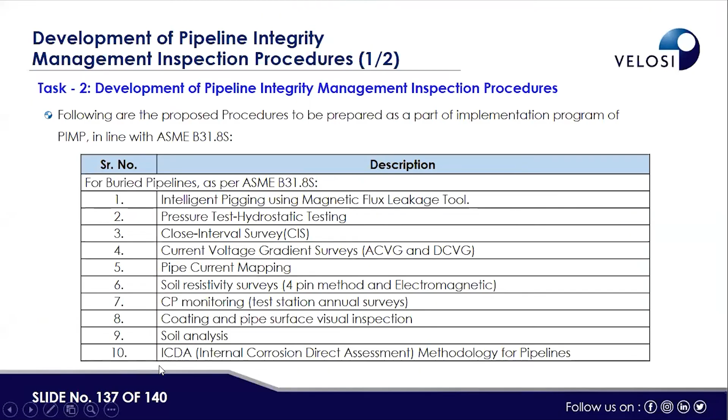Then the inspection procedures we prepared for the client, like ILI procedure, pressure testing, hydro testing procedure, close interval survey procedure, DCVG or ACVG procedures, pipe current mapping procedures, soil resistivity survey procedures, CP monitoring procedures, coating and pipe surface visual inspection procedures, soil survey, soil analysis procedures, ICDA procedures, and internal corrosion direct assessment procedures, index point of view.

So the detailed procedure includes pre-assessment, detailed examination, post-examination, record and documentation, and data required to use the ICDA methodology, a mathematically simplified flow modeling approach, and a complete flow chart for ICDA.

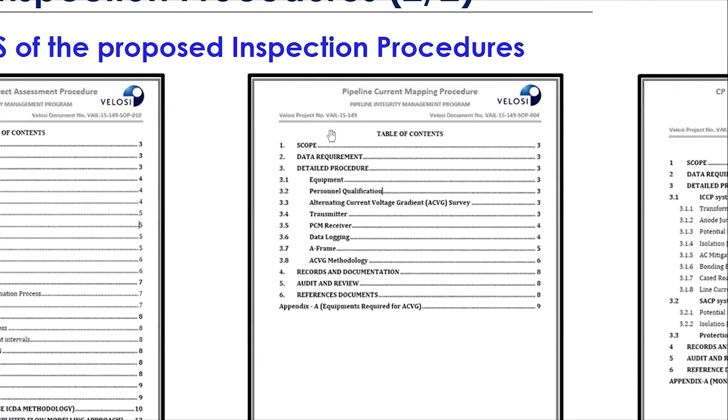Similarly, there is another procedure for pipeline current mapping. This is the cover of the component, like the index. Then the last one is the CP monitoring test.

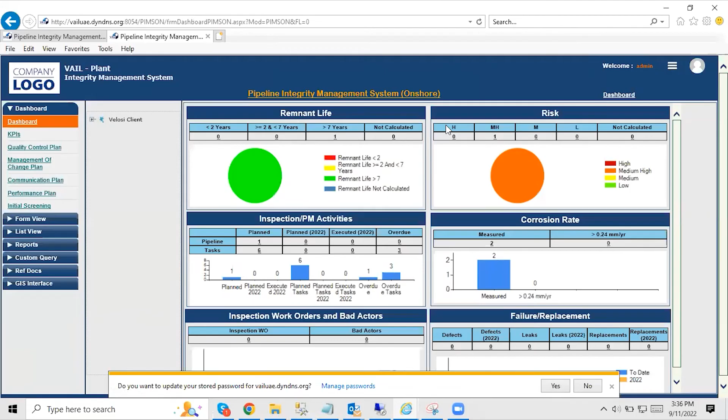So on the main screen you will see the dashboard, which shows the count of different parameters, like the integrity parameters remaining life: less than 2, 2 to 7, greater than 7. Risk, based on the client, the risk matrix can be configured in the system, showing high, medium, low. Inspection and PM activities, like how many pipelines are planned for the current year, executed in the current year, and overdue. The corrosion rate will also be calculated by the software.

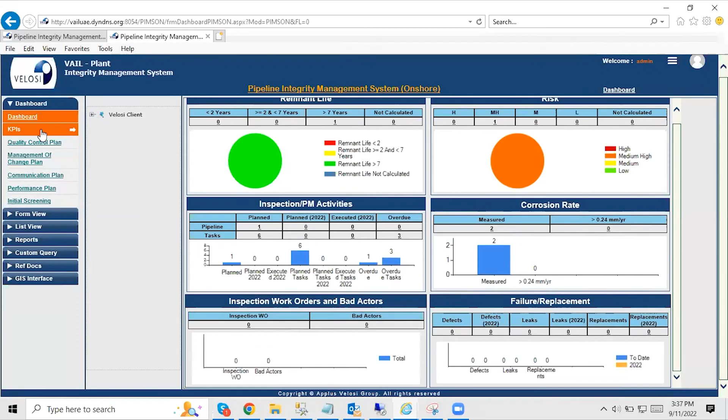Inspection work order and bad actor, which is coming from the ERP system. So you can see the inspection work order and bad actor, and failure in replacement, like defect in current year, leaks in current year, replacement in current year. Then there are also other parameters like KPI, quality, change management, and some other information. So this is the dashboard view.

You can go to the pipeline data, the form view, where you can see one line data at a time. On the left side you can see the tree, like company, area, location area, and then all your pipelines. Here is the main pipeline data, basic data with operational data like general composition, what is your product, what composition is inside that product, chemical injection, monitoring, maintenance, and then profile, where you can see all your profile data based on different KP with graphical representation.

Pipeline layout, like the test post on your line, you can define all your test post sections. Each pipeline can be divided into multiple sections with section name, section type, and other information. Then the component, if there's any component you get loaded here. The crossing, all your crossings, road crossing, railway crossing, and other crossings you can see on your pipeline, and anchor location.

Then there is some specific data on top, like you can create, edit, delete data one by one, or use the bulk load feature, and you can attach all the documents with this pipeline. Next is the history and survey records, so all your survey information you can attach here.

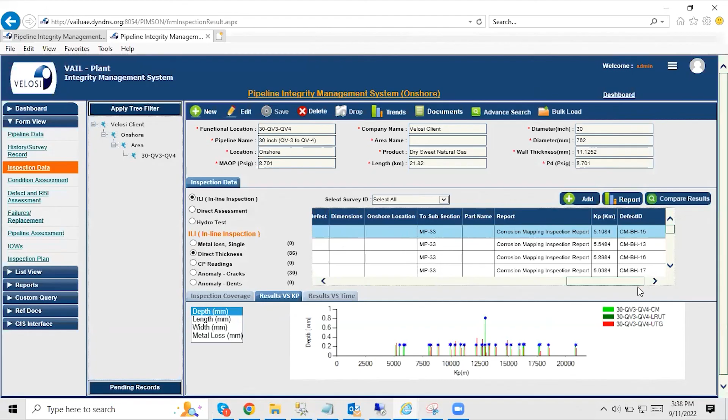Once you have the survey, then you go for the inspection data. So ILI inspection, like metal loss, direct thickness, here you will see your defect length, width, and metal loss, all information in a graphical way. CP reading, anomaly crack, anomaly dents, and then direct assessment, pipe to soil, DCVG survey. All this information you can see in graphical way and list view.

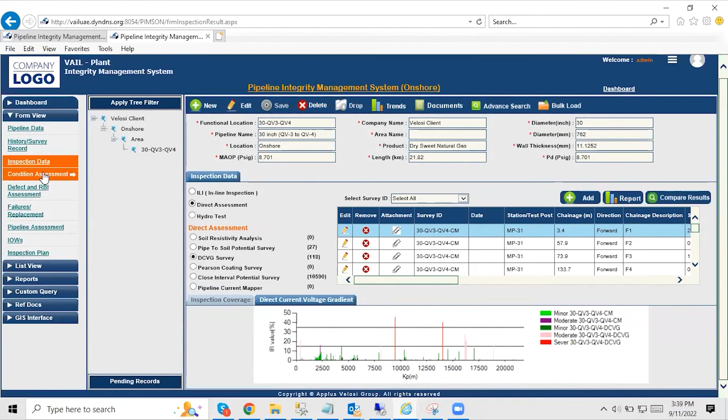Then condition monitoring, like bell hole examination, fluid analysis, corrosion coupon, and ERP. Next is the defect assessment, based on your ILI results, like ILI survey or direct thickness results. Here you will see all your results.

Further, you can filter with different parameters like defect length, depth, defect width, and survey ID, and proceed for detailed assessment, like metal loss assessment. Here all the calculation will be done by the software based on the standard B31G modified, like operating pressure, MAOP, test pressure, B31G, and shell. So the failure pressure, factor of safety, P-safe, and ERF will be calculated by the software.

Here you will see all the defects based on graphical representation, like if it is below the curve, it is in the safe zone. If it is outside the curve, then you need to do detailed assessment of those. Further, there's damage group, historical trend, risk assessment, and other details.

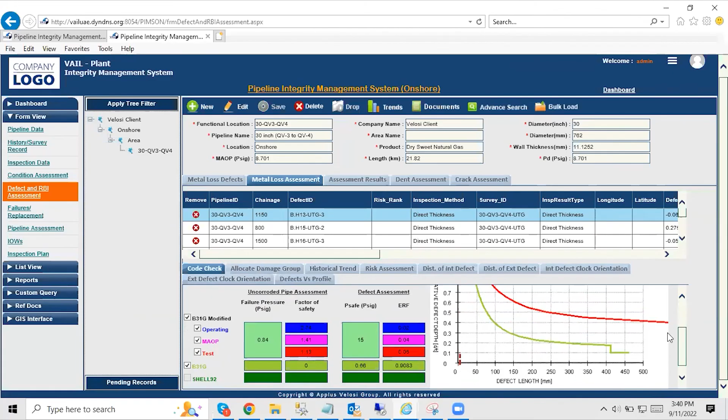Next is the assessment results. So based on your selected corrosion rate, like measured, which comes from history, or estimated, which comes based on your ECR model or expected corrosion rate, you can calculate your remaining life and then inspection interval. Similarly you have dent assessment and crack assessment.

Next is the failure and replacement. So if there's any leak and failure on the system, you can record it here, and any replacement will also be recorded here. Next is the pipeline assessment, where as we saw in the pipeline data, we divide the pipeline into different sections, so all sections are available.

Then next is allocate damage group. So for each section, we need to define the damage group like thinning, cracking, third party damage, and weather related. All groups are available in the system, like thinning with whatever applicable mode, similarly cracking, thermal fatigue, and other groups available in the system.

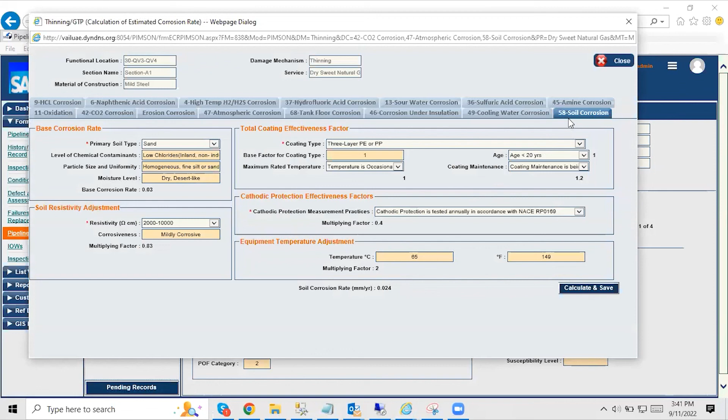Then Velosi RBI. So for each section, like thinning, if you have the measured corrosion rate, that will be considered for the calculation of probability assessment. Otherwise, the ECR model available in the system, based on that, you can calculate your corrosion rate, like soil corrosion, CO2, and whatever is applicable will be enabled, remaining will be disabled. Based on that, the software will give you the ECR corrosion rate.

Similarly, there are cracking models available inside the software. Then the consequence assessment, for economic there is level 1, level 2, and level 3. Based on the available information, you can use the level, similar for safety and environment. In the consequence assessment questionnaires, and then in condition summary, you can see the overall summary of your pipeline. This is for one section - what is the risk for each failure mode.

Like this is for thinning, medium, for cracking, medium, third party damage, medium to high. And the section risk will be overall the highest risk of all the damage mechanisms, which is medium-high. And you can also see all the sections.

Next is the risk assessment. Same information you can view in a graphical way and the chart view with the risk matrix. So this is the risk matrix.

In the inspection plan calculation, the system will give you the last inspection, which comes from your history. The next inspection will be calculated by the software, with remaining life like 7.2 years, inspection plan factor, and inspection interval, design life, life in service, Tmin. So all these things will be calculated by the software based on your selected corrosion rate.

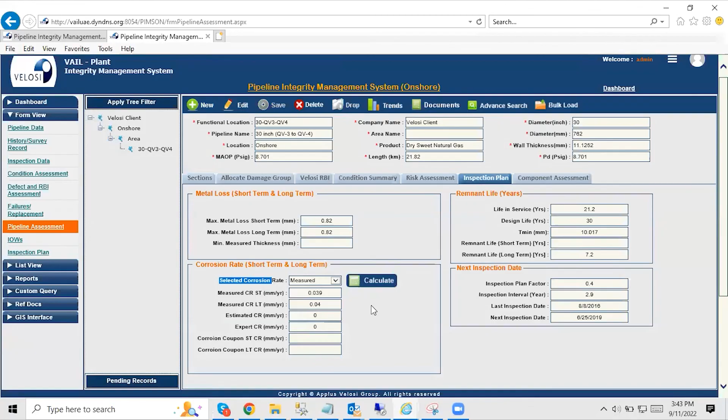So there are multiple options like measured, estimated, expert, or corrosion coupon. If you have a corrosion coupon, based on that, you can also calculate your remaining life.

Then the integrity operating windows. So you can record all your operating windows here.

And inspection plan. In the inspection plan, logistic requirement, inspection sketch, which will be made outside and you can attach in the system, and then the task like visual inspection, direct thickness, and some other code which is applicable for this pipeline, with other information.